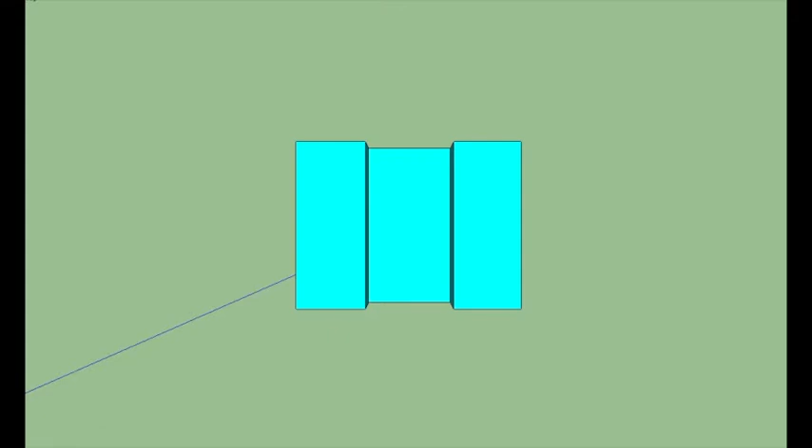Object number 2, see-through. Front view. Top view. Right side view. Object number 2.

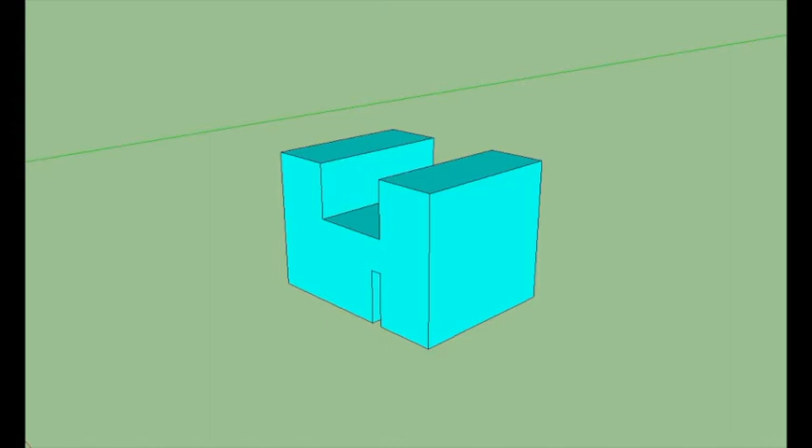So we're going to start again with our pencil, sharp pencil.

We've got our ruler. I've got my cat meowing in the background there.

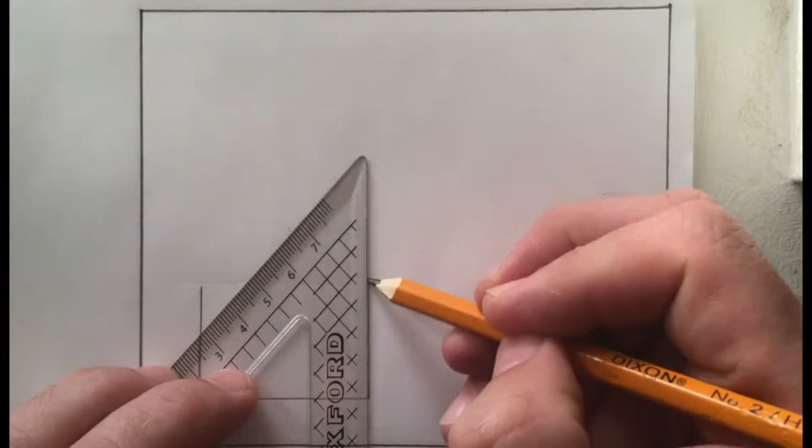So I'm going to start by looking at my object, and object number 2 is, again, essentially a block with some pieces cut out of it. So I'm going to start by drawing the block. There's the width. There's my height. And once again, I'm not measuring anything. I'm just kind of drawing with what I see, trying to be very accurate with my lines and my corners. So there we have a front view, a basic front view.

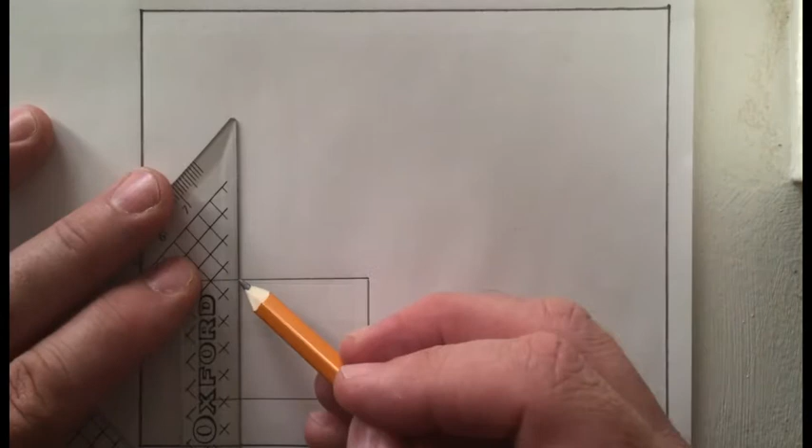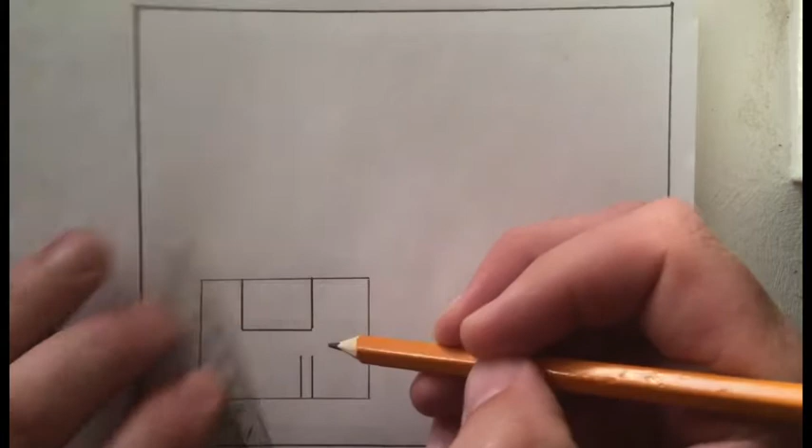So now what we have to do is take some pieces out. If you watch the video, you'll see that there's a big chunk taken out of right here on the top, and there's another piece taken out of right here on the bottom. So in doing these pieces, we can see these from the front view. So they're going to be drawn with dark solid lines because they are visible features. And the cut out of the bottom lines up with this side of the top cut. So I'll draw those in and finish that off right there.

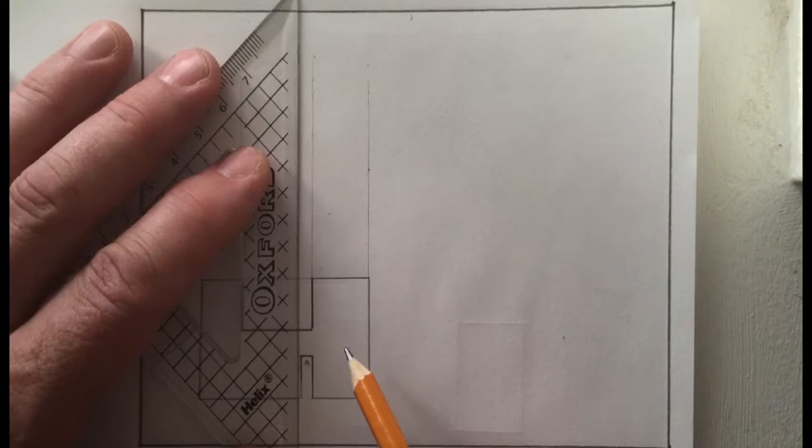Now these cuts remove this top piece. So I'm just going to use my eraser here to erase those. And the same on the bottom. So there is my front view. Now information can be taken from this view up to your top view with projection lines from all features that you can see. And again, my projection lines are nice and light. This line lines up perfectly with this line, so I'm not going to draw it again. There's no point in doing that. I'll draw another projection line there. So there we have my projection lines going up from all the visible features.

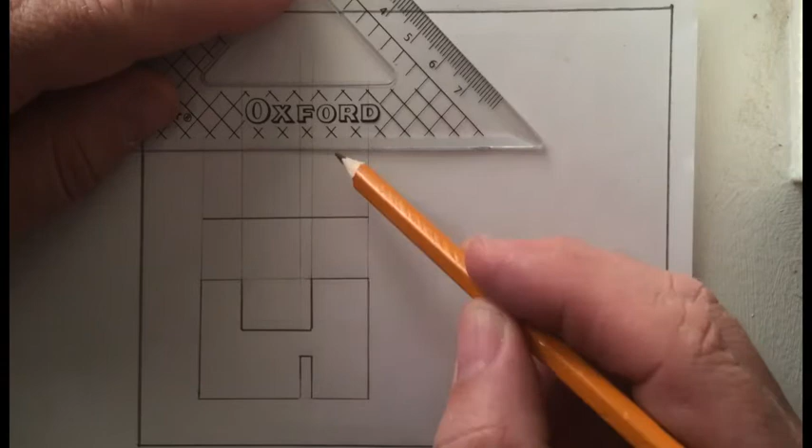So at this point, I'm going to draw my top view. So I know that there is wood from left to right on my object. So I'm going to go all the way across. And I know that the object's not quite as deep as it is tall. So this space here is going to be less than this space here. So I'm going to draw another line across there. So looking down on my object, I can see this edge.

Yes, George. My cat George is wanting to help here.

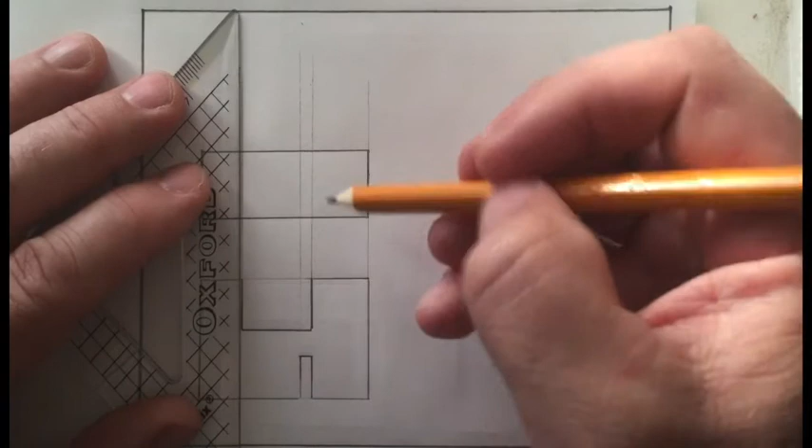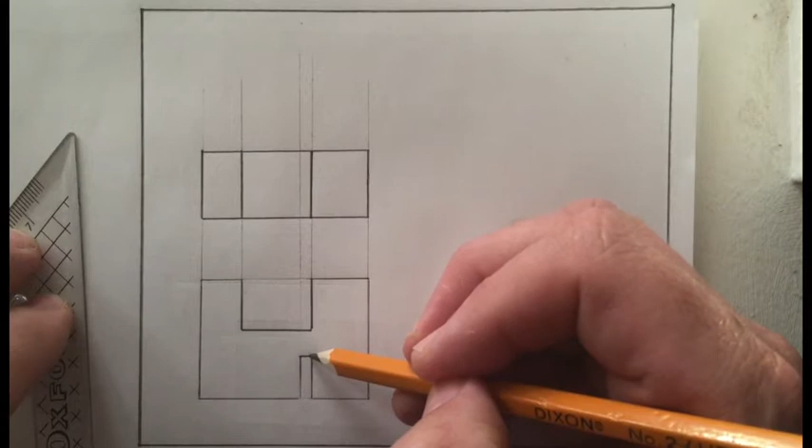So there is my other edge, solid lines that I can see. I can see this big cut. So it's going to again be a solid dark line. And now this is a new trick that we're going to learn, and this is going to be my hidden lines. I can't see this cut on the top view because we're looking down on it and that cut is out of the bottom. So it's no longer visible, but I know it's still there. So that means both of these lines need to become dotted. Now because we already have a solid line here, the solid line obviously will cover the dotted line. But right here, we are going to see a dotted line representing a hidden feature. A feature that is still there, but we cannot see it from this particular view.

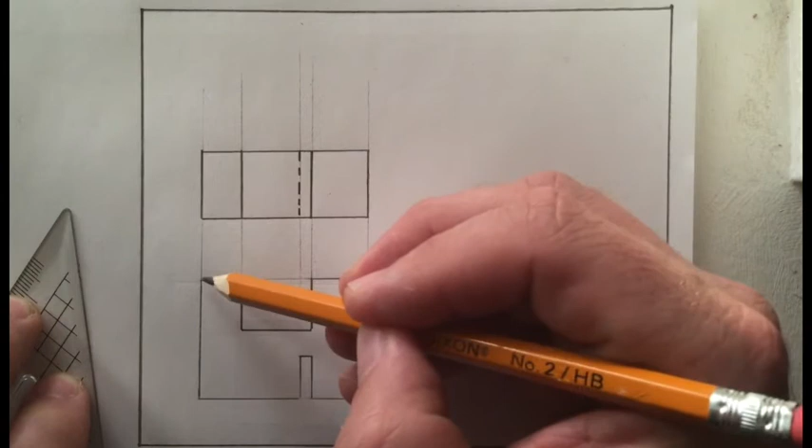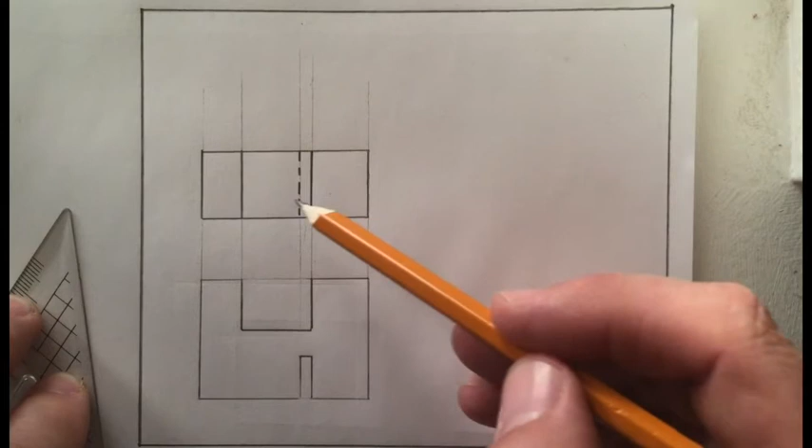Now you may have noticed that when I'm drawing projection lines, I don't ever draw within the actual object. Notice the projection line from this cut started up here, above the object. Don't start it right there. You shouldn't have any lines within the object if you can help it. Okay? So there I have a front view, and I can see those two features. I have a top view. I can see the big cut, but I can't see the small cut, so it becomes dotted.

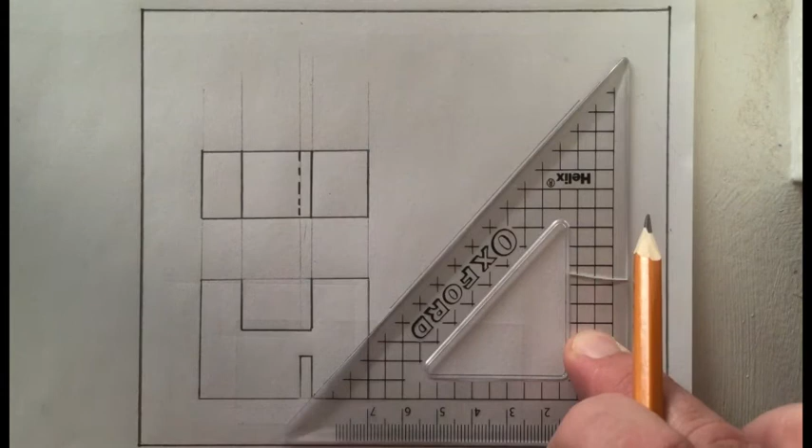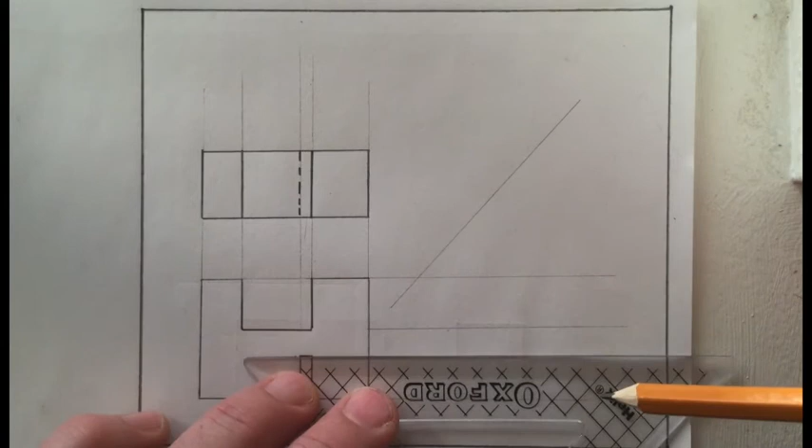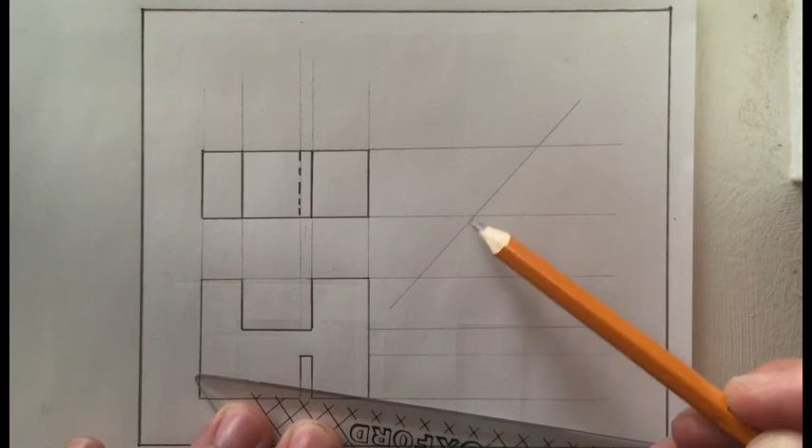Now we draw our 45-degree line. So I use my 45-degree square. And you remember me saying in the first activity, it doesn't matter where you draw the line from. So I'm going to draw my line just there, noticing that this line here is parallel to the bottom of my page. So now that I have my 45-degree line, I'm going to start extending projection lines all the way across. So I'm going to do projection lines that represent the height of the front view. I'm also going to do projection lines showing me where this cut is located. There and there. And again, my projection lines are nice and light. And I will do projection lines again from the front and from the back. And we're going to clearly see here, this is the depth of the object. Our 45-degree line will transfer this information accurately to give us our right side view.

So there is the front of my object. I'm going to go from that spot right there, try and keep my ruler as perpendicular to the bottom of my page as I can. And there is my other point of intersection. I drop my line straight down. So what you're seeing over here then is the bottom of the object right there, the top of the object right there. There is the depth of that top cut right there. And there is the depth of the bottom cut right there. There is the front of the object in our top view right here. And there's the back of the object in our top view right there.

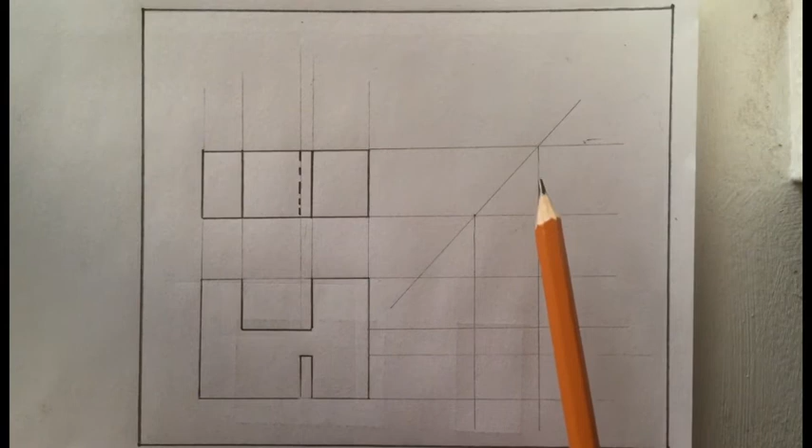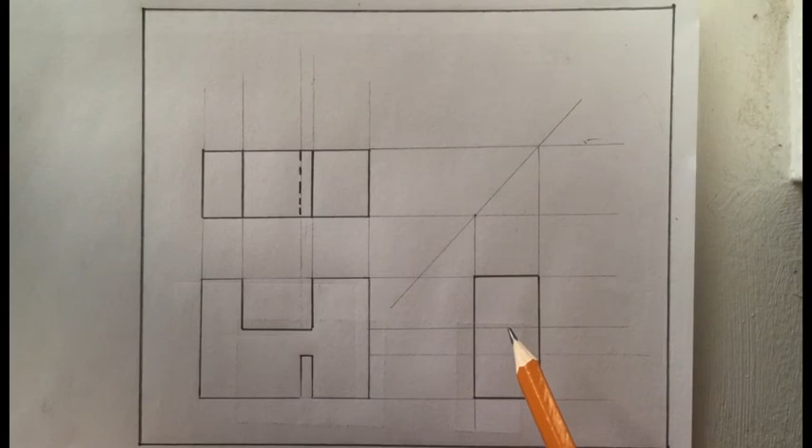So let's fill in what we know. We can see the front and back, dark lines. We can see the top and the bottom, dark lines. We can't see either of these cuts from the right-hand side because they go this way. We don't see them on that right side view, but we know they're still there. So there we get our dotted lines representing hidden features. So there we go. We have a completed orthographic projection.

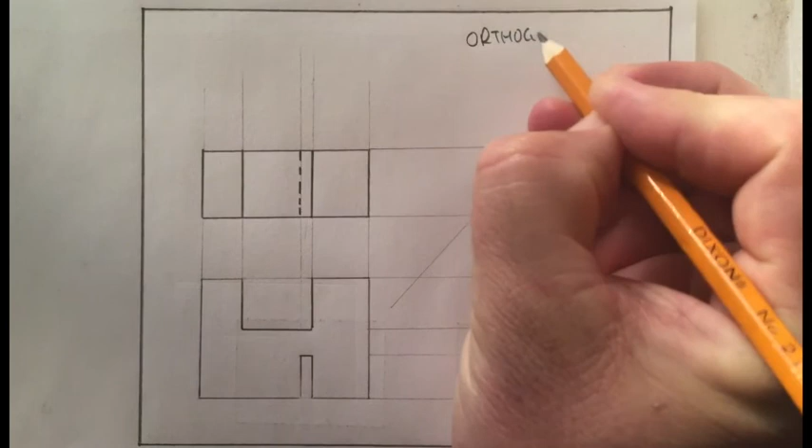So let's go right away and take care of our title block. Orthographic projection. And this is object number 2. My name, Mr. Kempton, and today is May, what is today's date? The 21st.

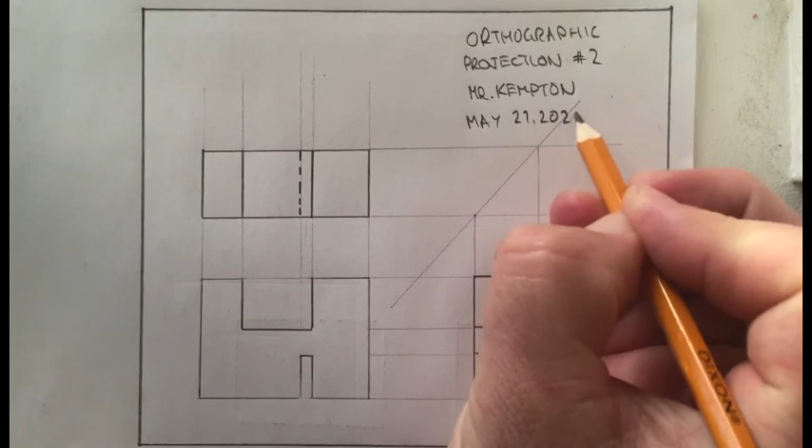There we go. Now again, our projection lines are still on there. You do not need to go back and erase all of your projection lines. If they're done properly, they're nice and light, and we can clearly see that they're different line types than our solid line, and clearly different than our dotted line. So keeping your line types proper means you don't have to go back and do a lot of erasing and fixing at the end. All right, there's orthographic projection number 2.